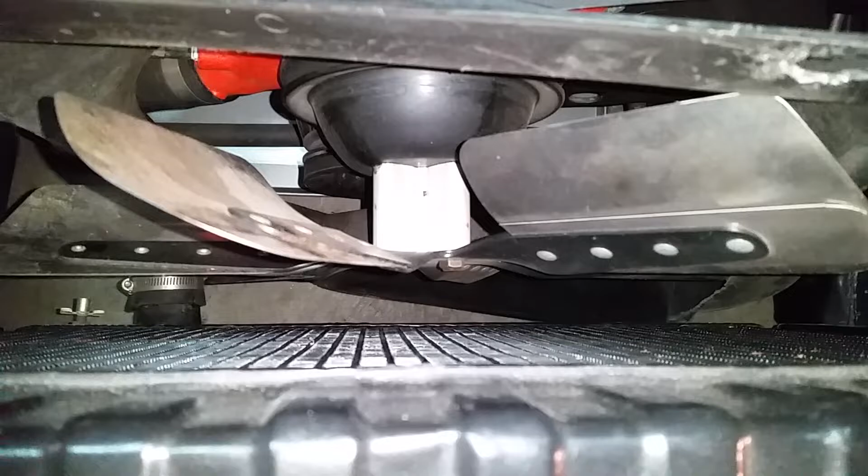The book is calling for 3/4 of an inch.

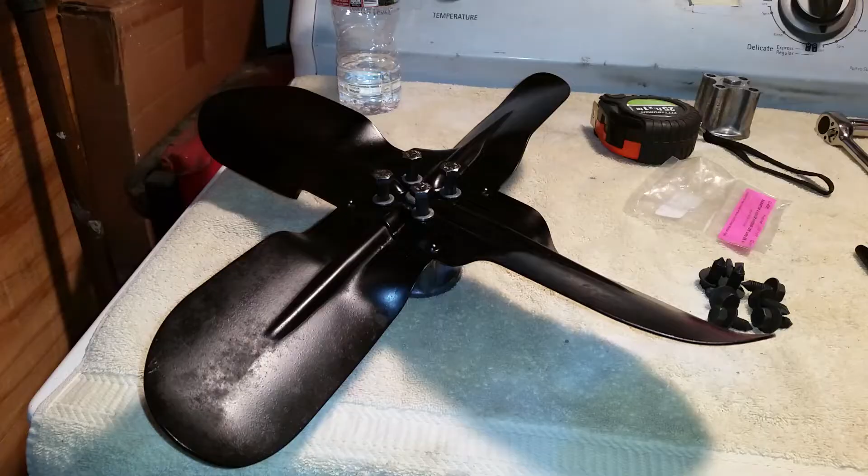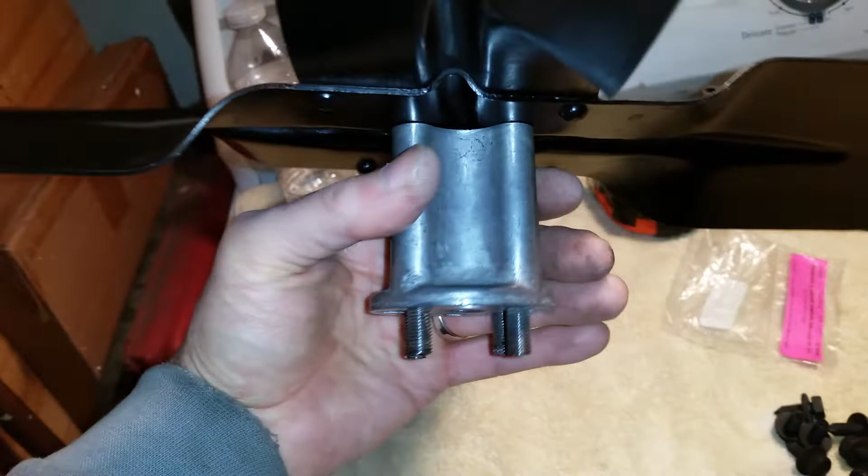So this is the setup I'm going with. It's going to be the 2 1/4 inch spacer, the 2 1/2. So that gets me right where I need to be.

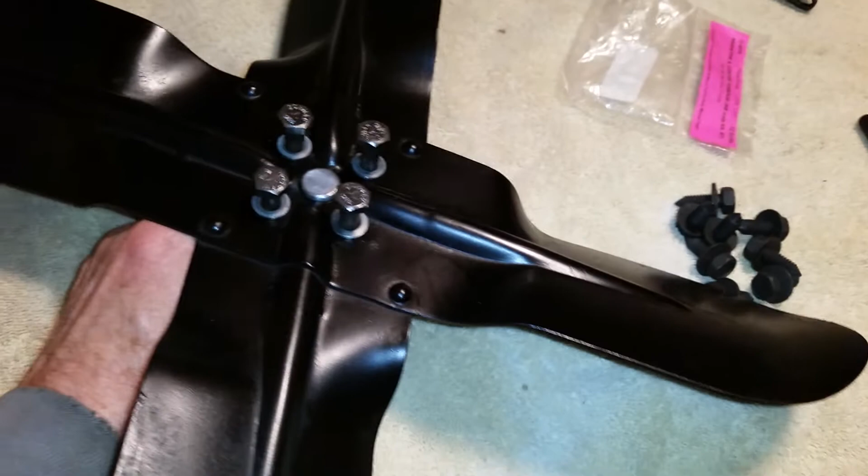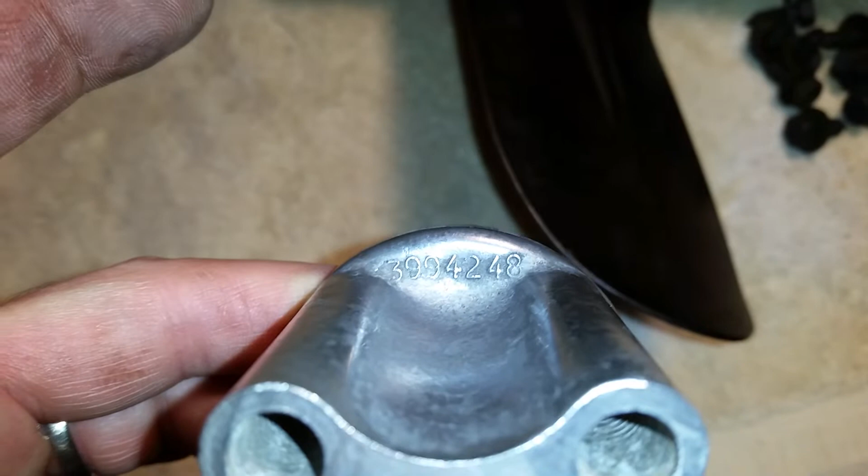This spacer is a 3994248. It's 2 1/4. This little fan I put on isn't cutting it. So...

It's a 17, I think it's a 17 inch or 17 1/2. I mean, it's just not cutting it. I'm gonna have to put... so this is what I think is happening.

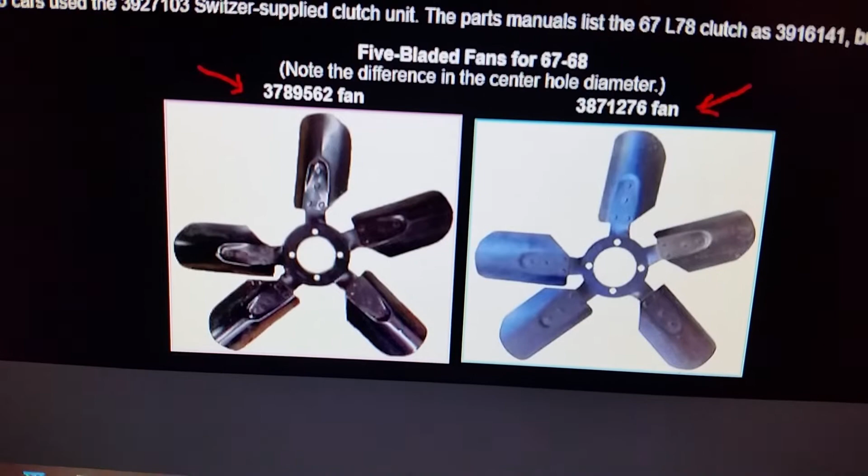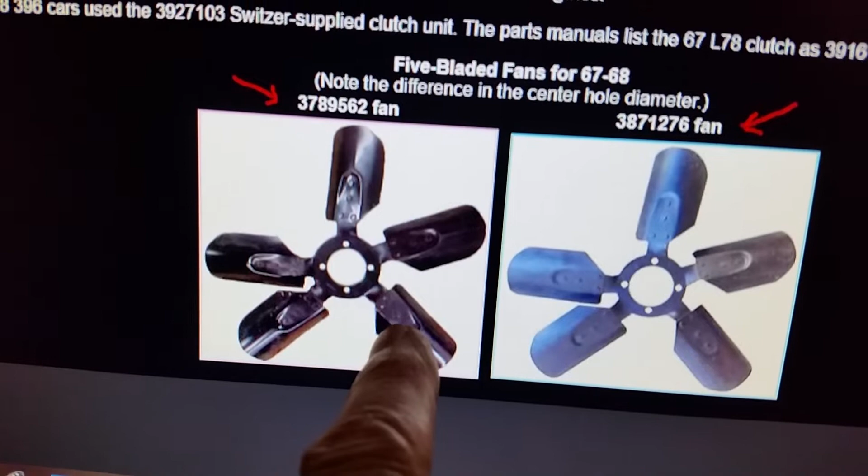So my car, this is the 562 fan. This is the fan that's in the assembly manual for an L35 car with K02 cooling. This is the fan that I bought.

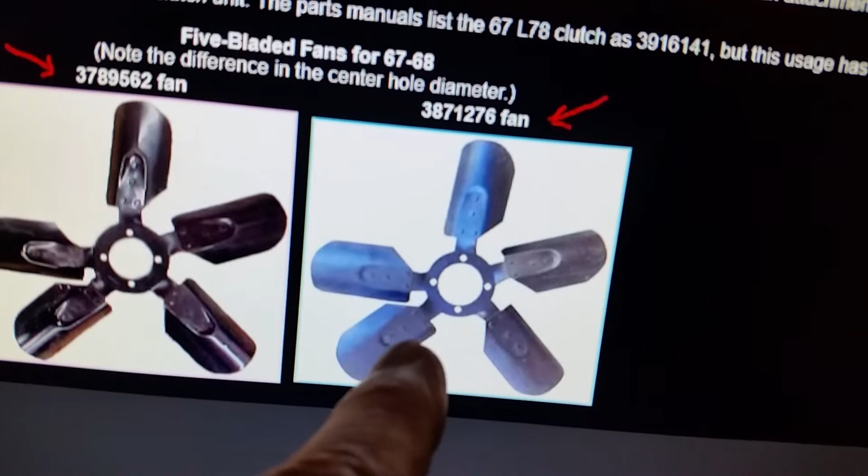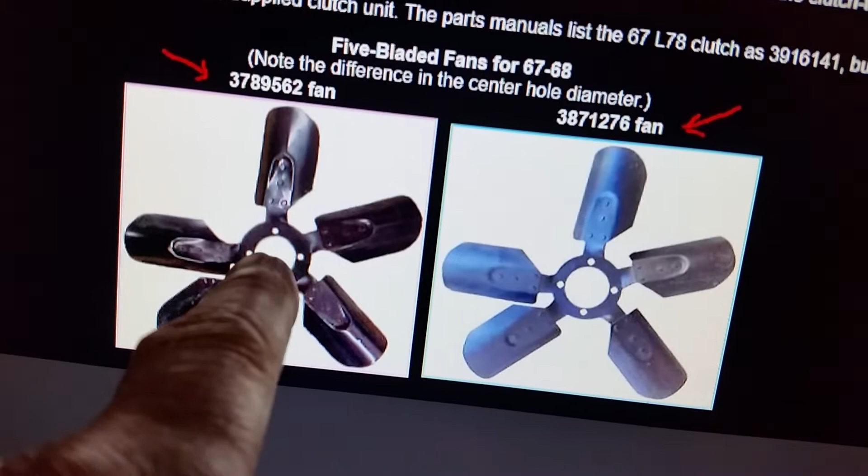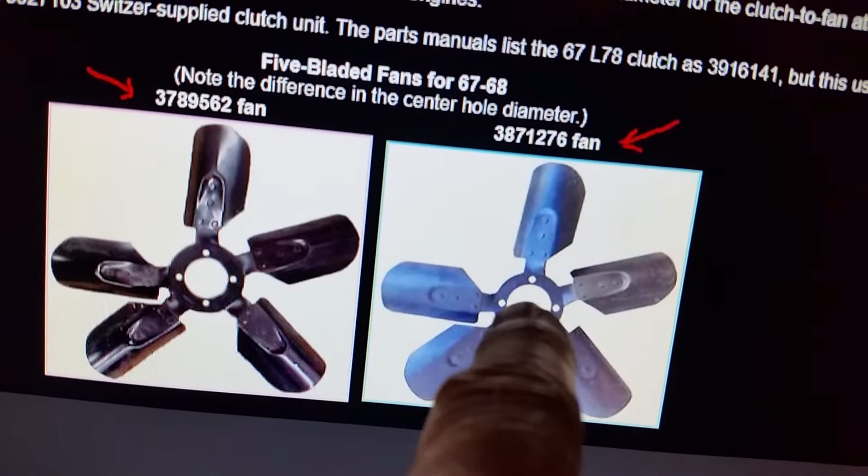So if you, in 66, if you ordered... this fan has the 233 hub and the 3-inch bolt spacing. This fan has the 260, 2.6 inch hub diameter and the 3 1/4 inch bolt spacing.

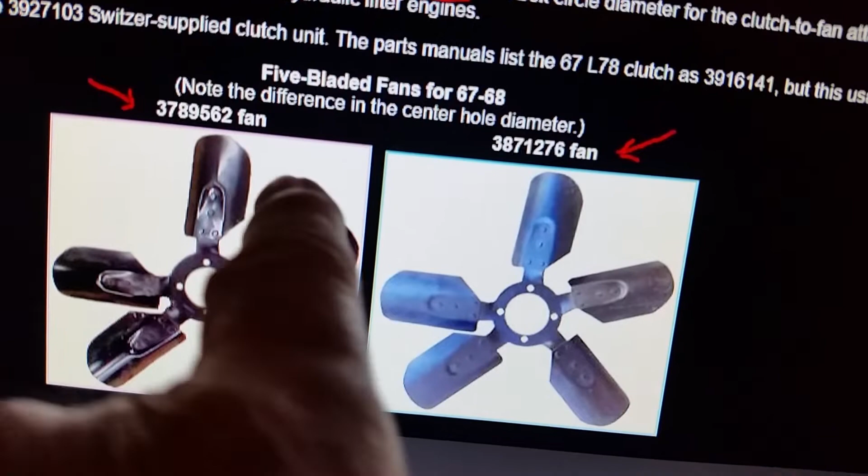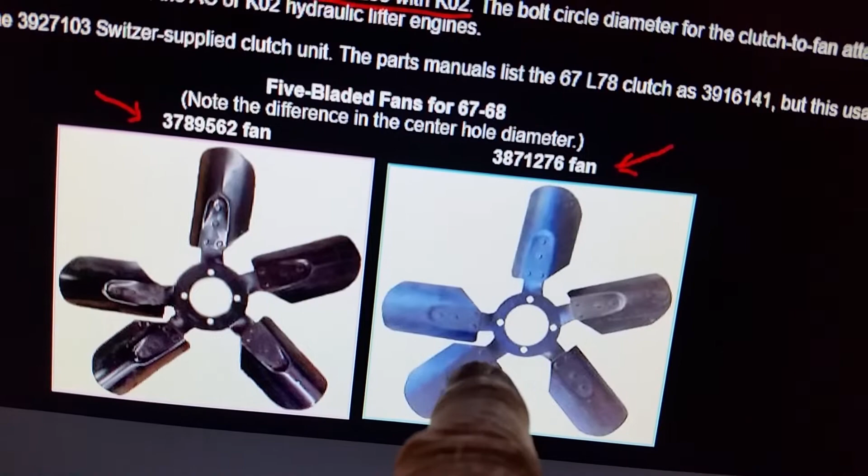And the blades aren't flat. These blades are flat. They're attached to just, the blades are attached to these parts, and in here they're sort of perforated. So this fan sits a little bit closer to the radiator than this fan does.

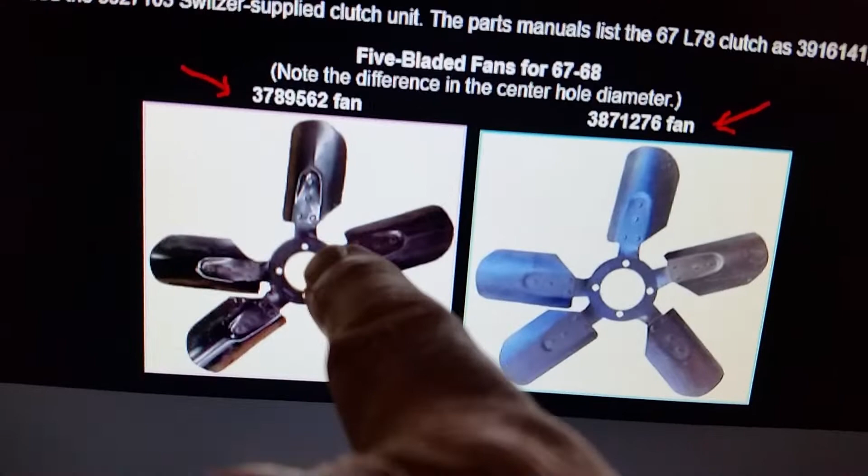But so what they're saying, from what I found out, if you ordered a hydraulic lifter car with AC or heavy duty cooling, the 4-row radiator, you got this fan. And in 68, they changed it.

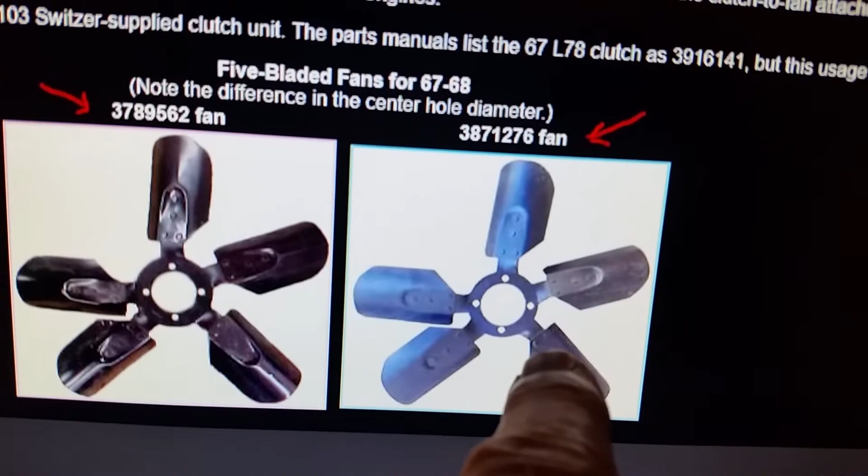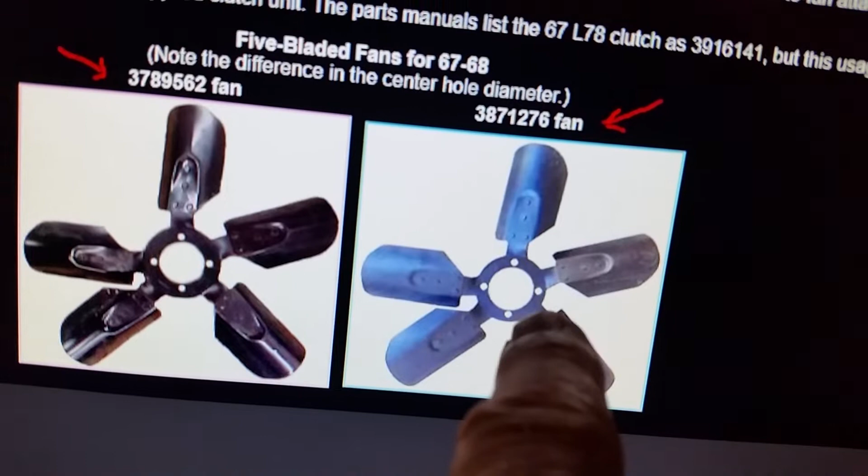If you ordered a hydraulic lifter engine, like big block, if hydraulic lifter like an L35 in 68 with AC or heavy duty upgraded cooling, heavy duty radiator, like 4-row radiator, you got this fan with fan clutch.

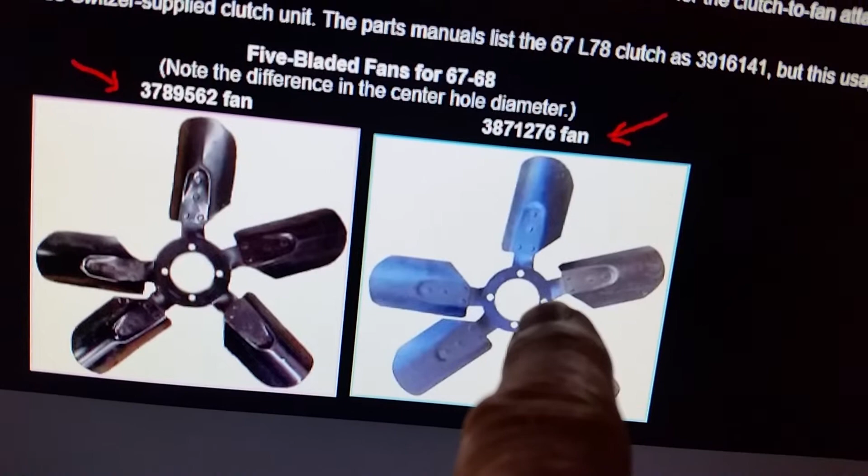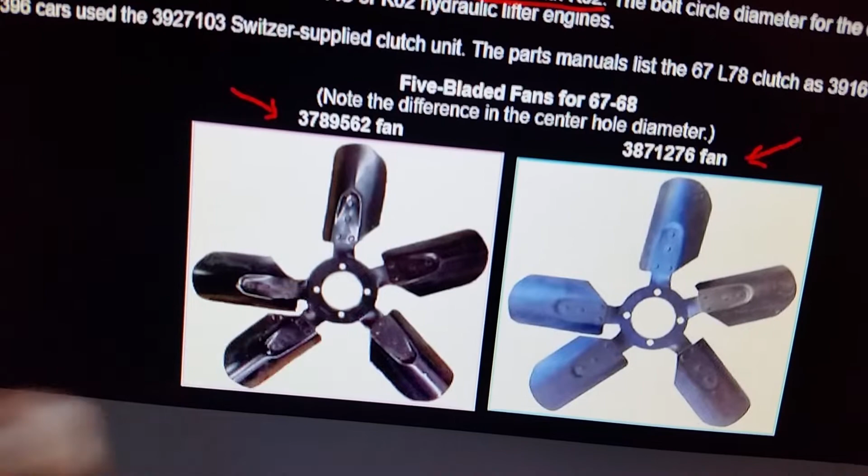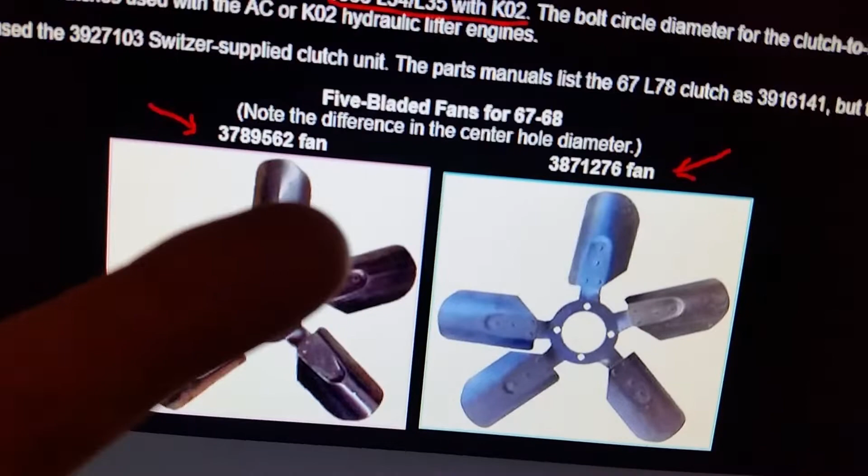So the 2710 fan clutch that I first bought from O'Reilly's would fit this fan. So their website is correct. I had to, unfortunately, for 68, it calls for the same fan clutch.

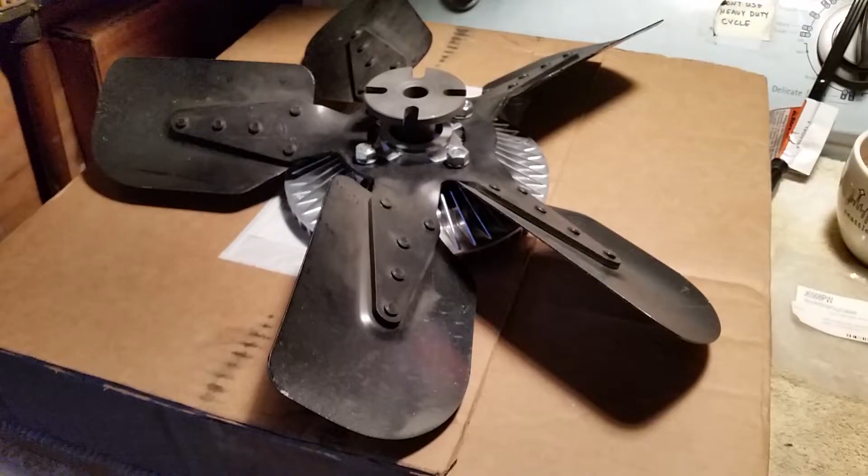So the information begins to skew a little bit. So I had to sort of figure out which fan clutches would fit this fan that I bought. So here is an example of the 276 fan.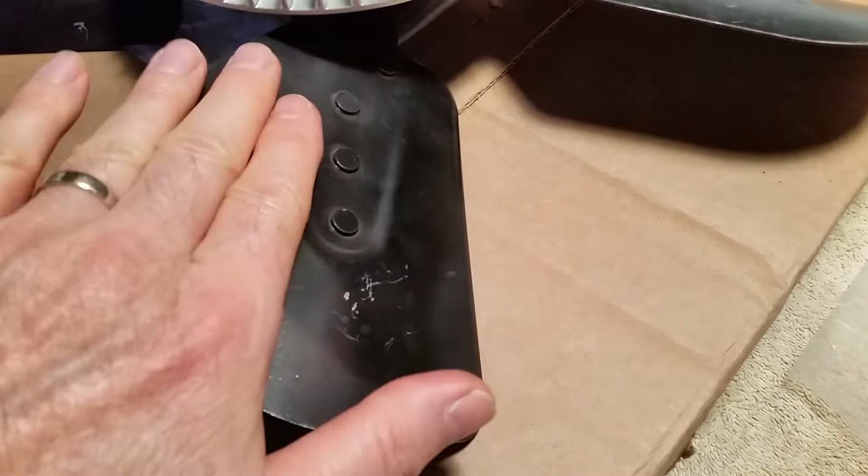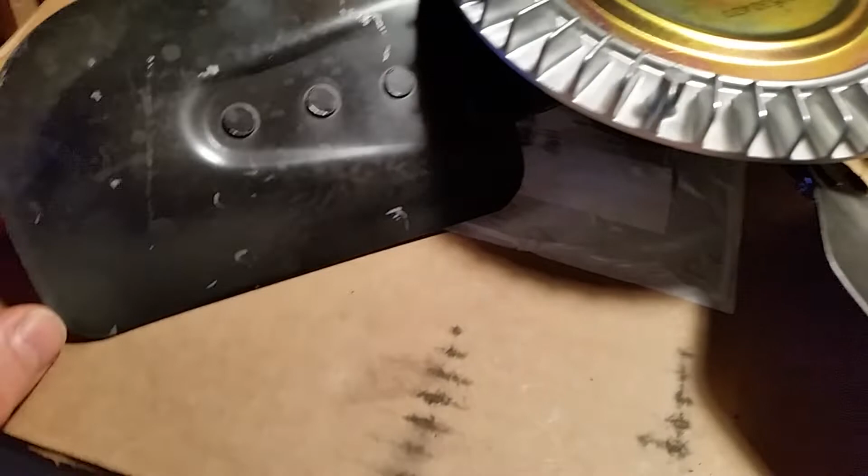The 562 fan, this blade would be completely flat, and there would not be this little perforation right here. So it'd be flat. So that's really the only difference, and the hub dimensions of the hub. So that's really the only difference between this fan and the 562 fan.

And I've also read that this fan could come on your car in 66 as well. I don't know. I'm not going to worry about it unless a 562 fan presents itself at a reasonable price, like $40 or something. I got this fan for $40. So I mean, this is a swap meet fan, $20 swap meet fan, 25 years ago, maybe 10, $10.

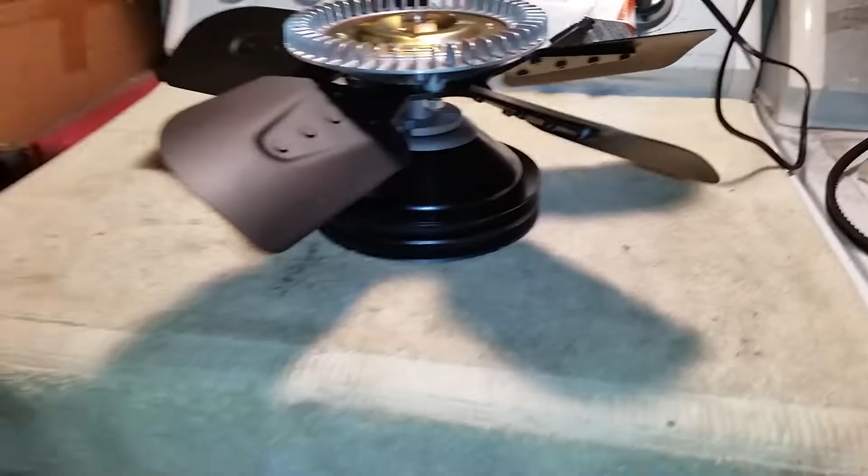Flex fans were more prized than these OEM fans. But this fan is really just, it almost looks... it's been well preserved. I mean, there's no... so here is all mocked up, all newish.

I'll take a video of this before I put it on the car when there's more light, but it's looking pretty sharp. Brand new to me. It's pretty awesome.

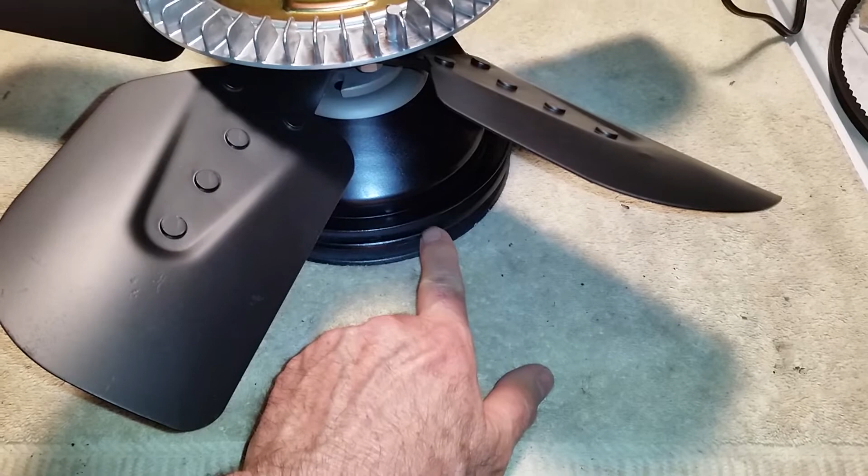Now it just needs to work. There's like 2 thumbnails of clearance between the crank pulley and this water pump pulley. It's like ridiculous. If the water pump shaft ever goes out, this pulley would rub, I'm sure, on the crank pulley or hit the balancer.

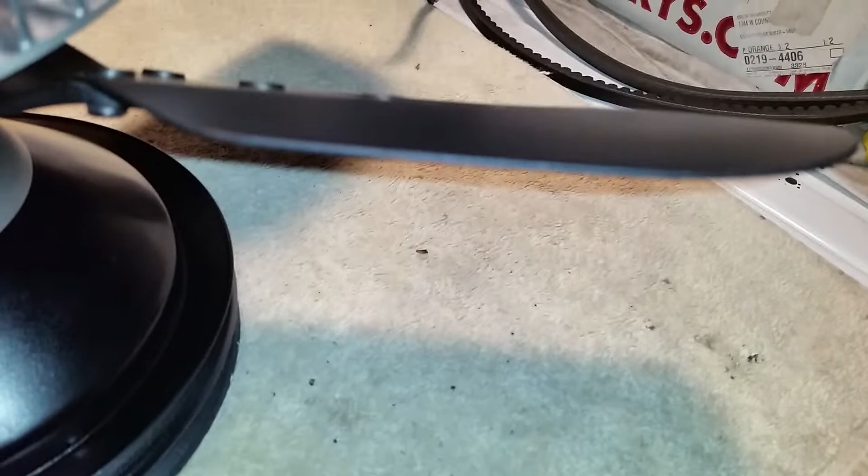It clears the balancer pretty well. It's fully clear, but it's really close. It's probably maybe 2 fan blades thickness, maybe one and a half fan blades.

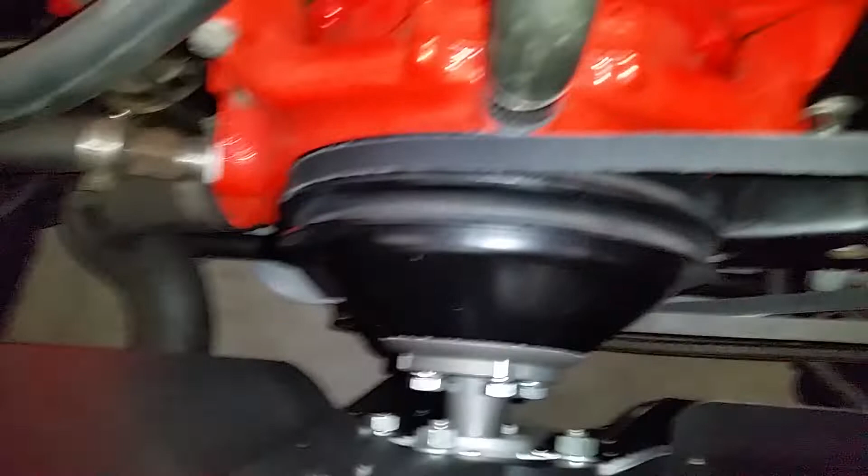That is a fan clutch, and a new pulley. That's the 0356 pulley that I've had sitting in my box for a good 12, 13 years. So I dragged it out, put it on.

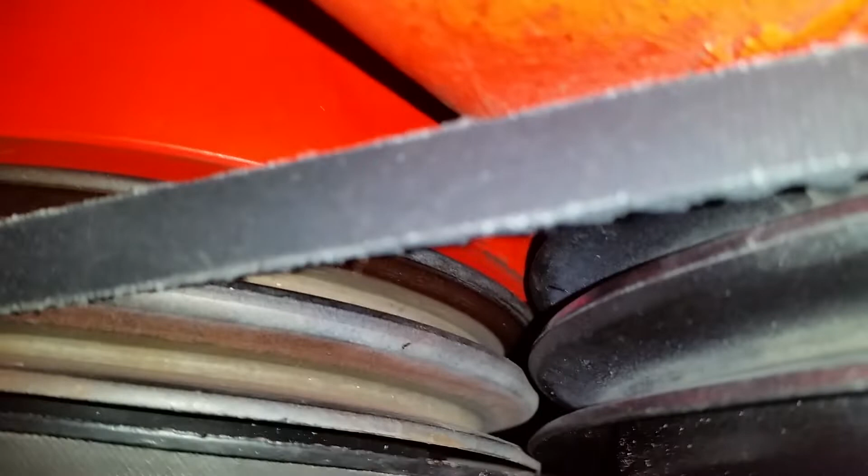It's got just a smidge of clearance, but enough where it's not going to rub. So it's just like so close, it's ridiculous.

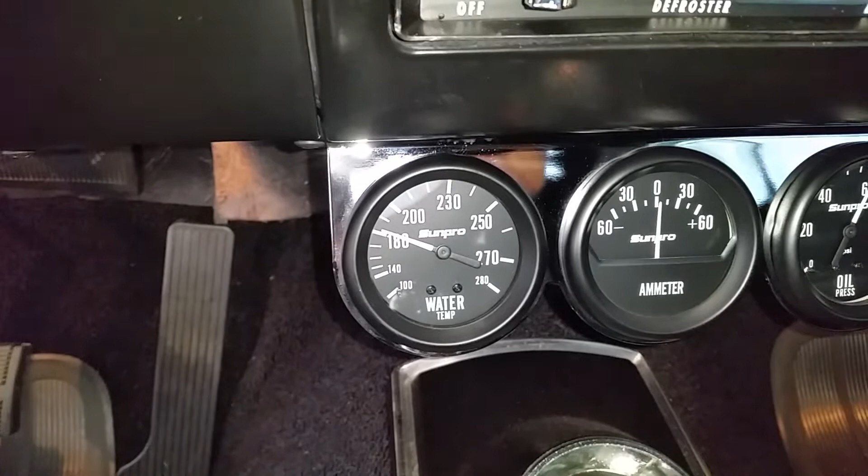It's like idling at about 650.